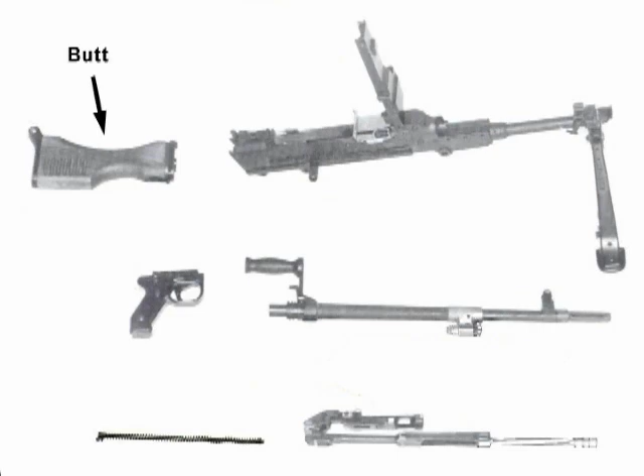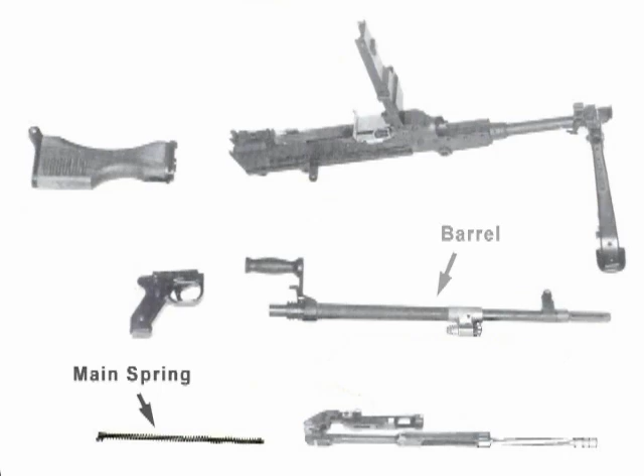The parts of the C6: butt, receiver, feed cover, pistol grip, cocking handle, barrel, main spring, piston extension assembly. Now test yourself on the parts of the C6.

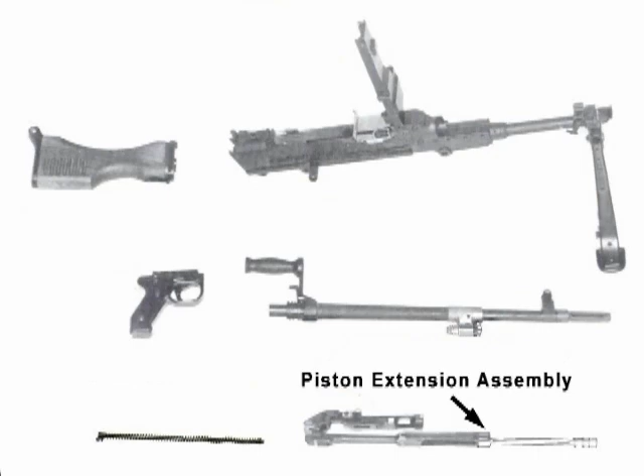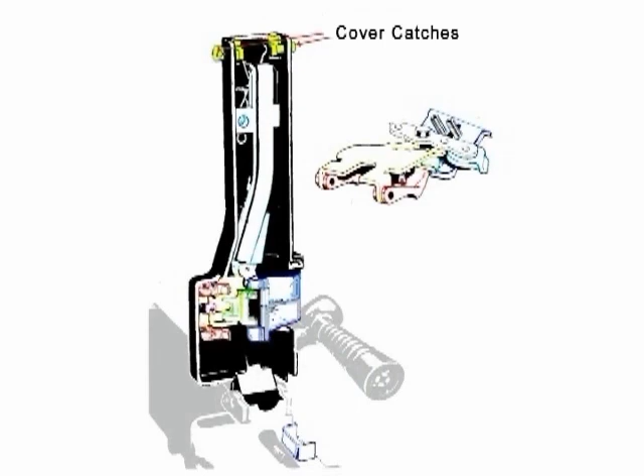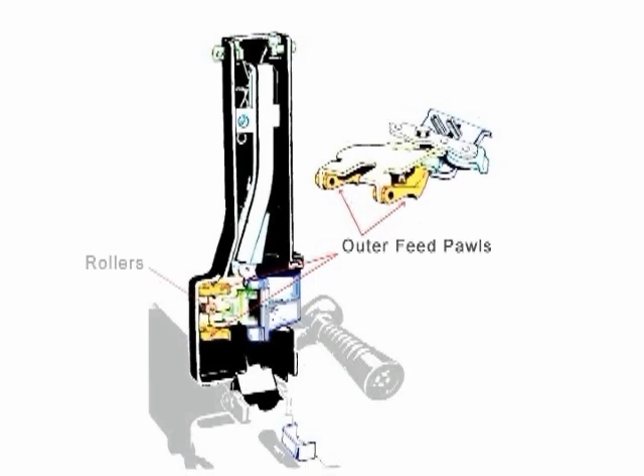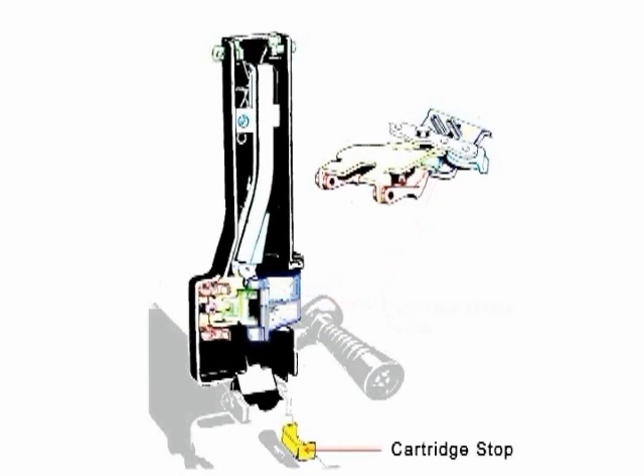The parts of the cover: cover catches, catch springs, feed arm control spring, feed arm, fork of the feed arm, outer feed pawls, rollers, plate, pivot arm, inner feed pawls, cartridge guide pawls, cartridge stop. Now test yourself on the parts of the cover.

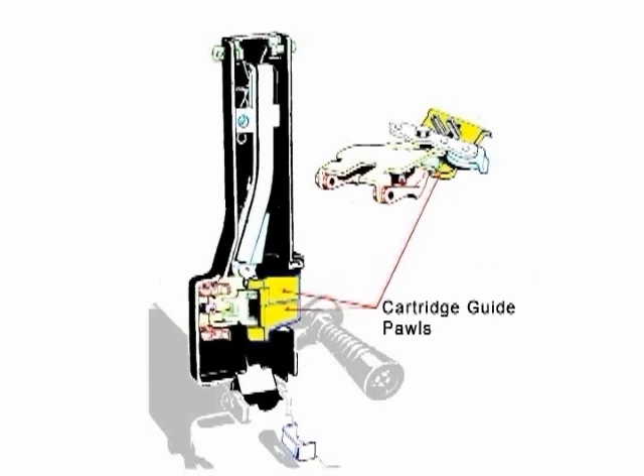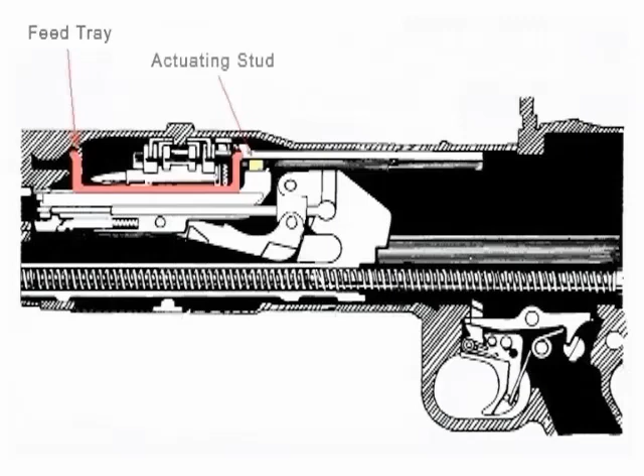The parts of the receiver: feed tray, actuating stud, locking shoulder, locking cam, locking lever link, sear tripper, sear, trigger. Now test yourself on the parts of the receiver.

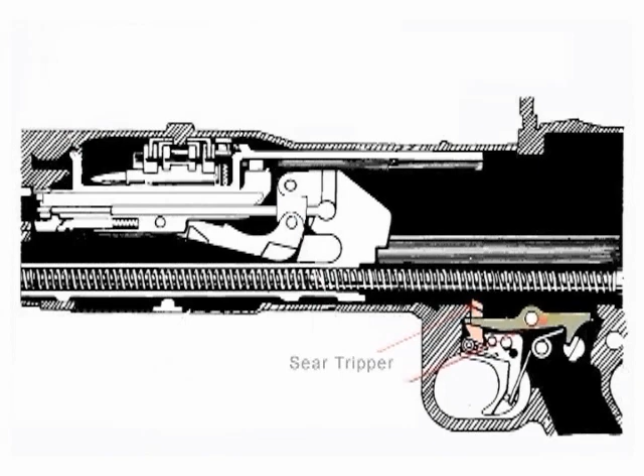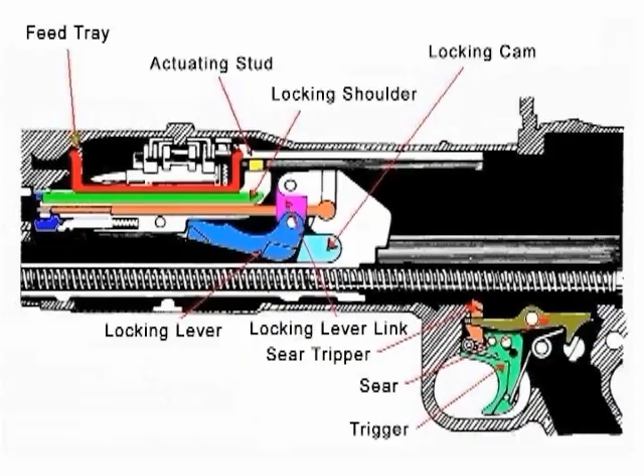The locking lever link rotates forward and up on its axis, lifting the locking lever out of engagement with the locking cams. The breech block is jerked slightly backwards. The breech is now unlocked.

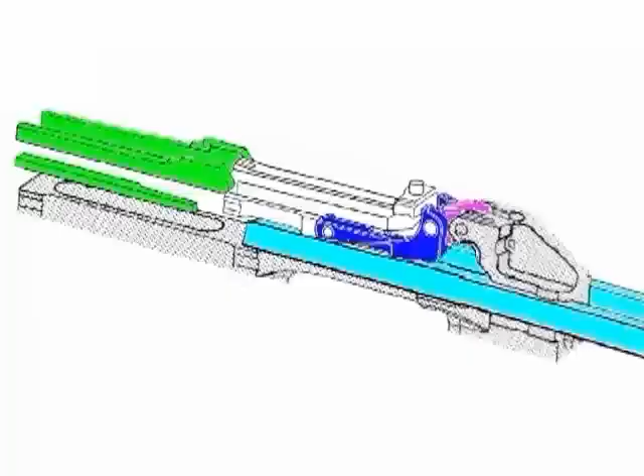When the working parts are fully forward, the locking lever is down in the seat between the locking shoulder and locking cams. The breech block cannot move directly to the rear, so the breech is locked.

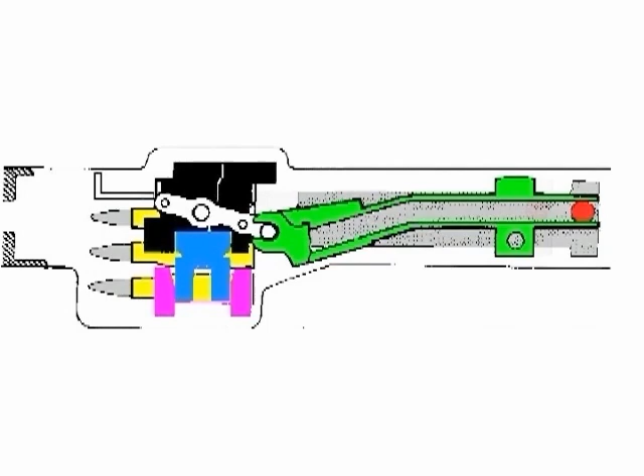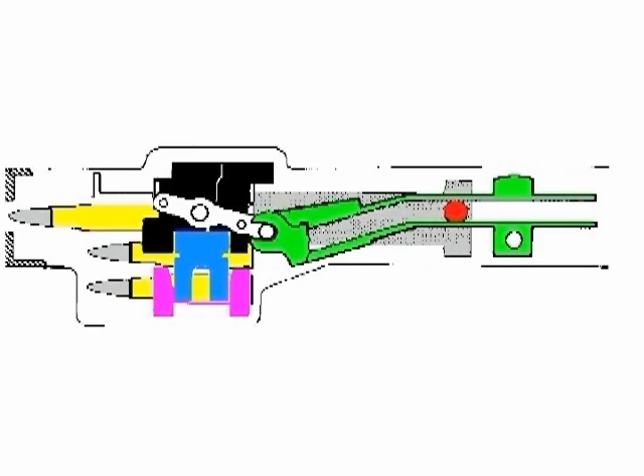The outer pawls push the round, and the inner pawls go behind the next round. Once the actuating stud stops moving, the round is in the chamber.

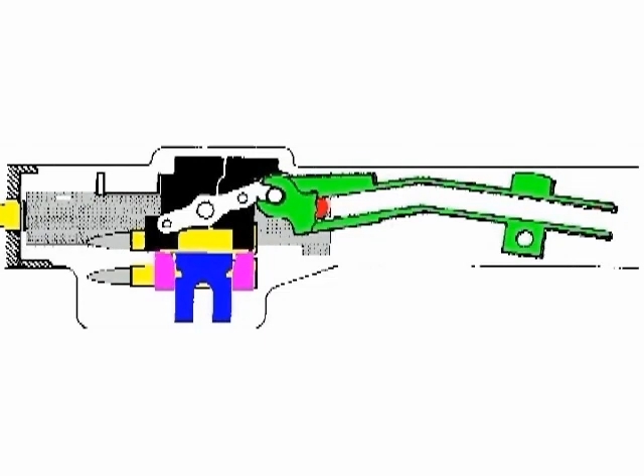When moving to the rear, the actuating stud moves the feed arms to the left, which moves the feed arms pivot. The outer pawls ride over the next round and settle behind it. When the actuating stud arrives in line, the inner and outer pawls stop moving. The feed horns ride under the first round, moving the actuating stud to the end of its course.

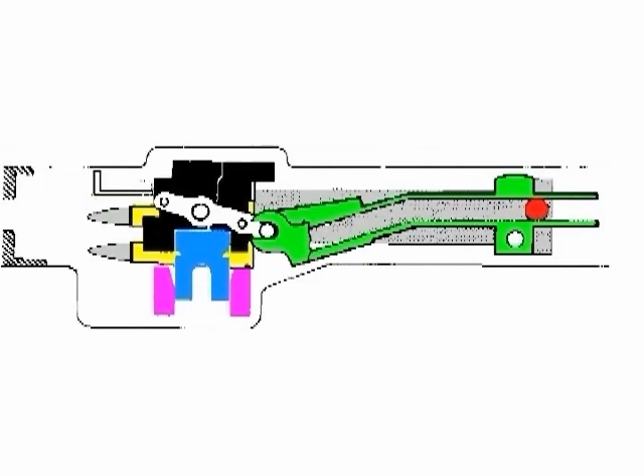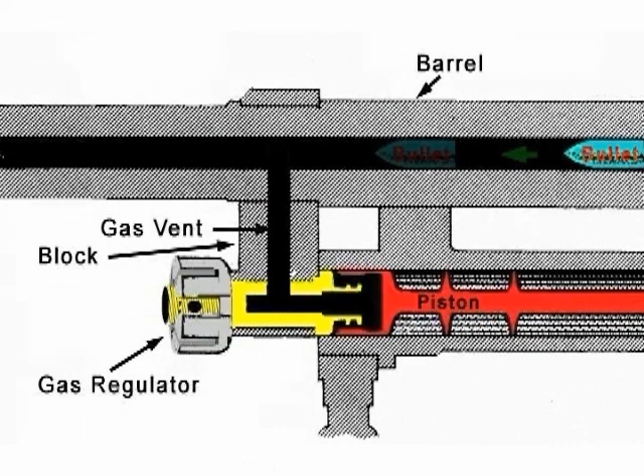When the gas pushes the bullet, it passes through the gas vent, which sends gas to the gas regulator. This sends gas toward the piston head, moving the piston to the rear. Pull on the cocking handle to unlock it. That's followed by compression of the main spring.

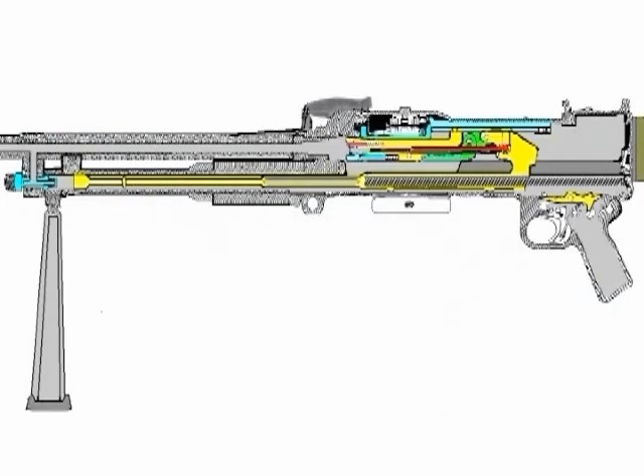On releasing the trigger, the sear remains down, but the tripping lever rises. As the working parts move to the rear, the end of the piston hits the tripping lever, which in turn allows the sear to rise and engage in the bent.

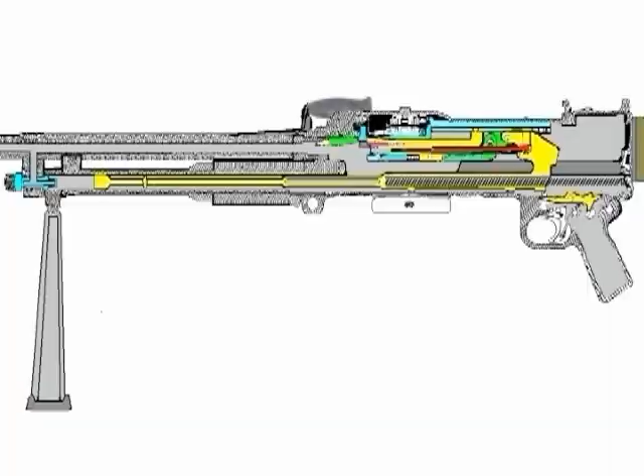When the trigger is squeezed, the nose of the sear is depressed, thus freeing the extension. The main spring pushes the working parts forward. The feed horns strike the base of the round, feeding it into the chamber. As the working parts move forward and the round is fed into the chamber, the locking lever is forced down by the locking arms, thus slowing down the forward movement of the breech block.

The piston extension, still moving forward, causes the locking lever link to rotate downward and back, forcing the arms down to their fullest extension in front of the locking shoulder. The extractor rises over the base of the round, and the ejector is compressed. The round is now fully home.

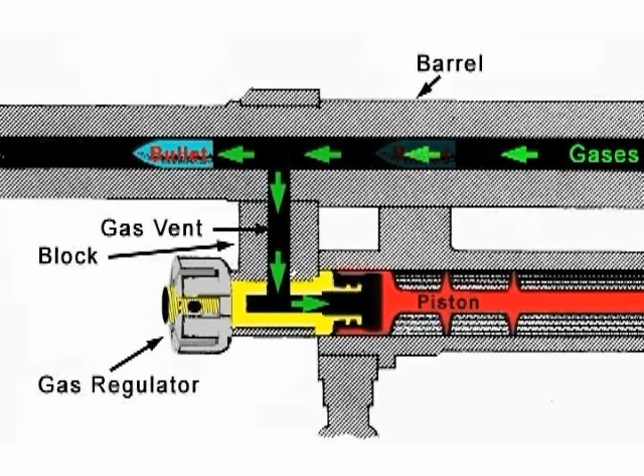When the round is fired, some of the gas passes through the gas vent into the gas cylinder, striking the head of the piston and driving it to the rear. During the primary movement of the piston, when the breech is still locked, the bullet travels from the gas vent to the muzzle. The breech block, being jerked slightly, is enough to affect the primary extraction of the empty casing.

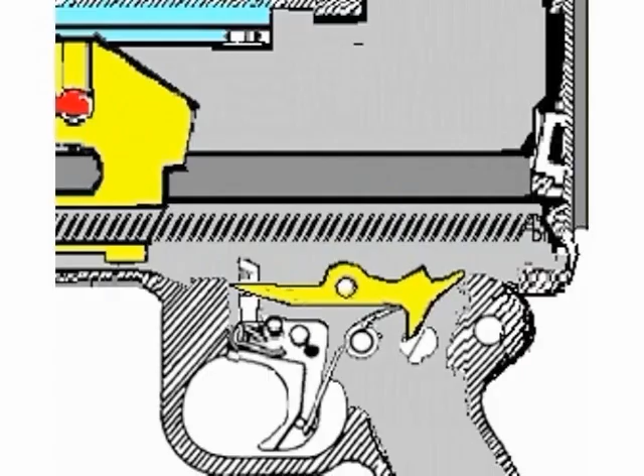When the breech is fully unlocked and the breech block starts its rearward movement, the extractor withdraws the empty casing from the chamber. The ejector forces it from the face of the breech block out through the ejection slot. The working parts continue to the rear and the return spring is compressed.

If the trigger is not squeezed, the sear remains down but the tripping lever rises. As the working parts move to the rear, the end of the piston hits the tripping lever, which in turn allows the sear to rise and engage in the bent, holding the working parts to the rear.

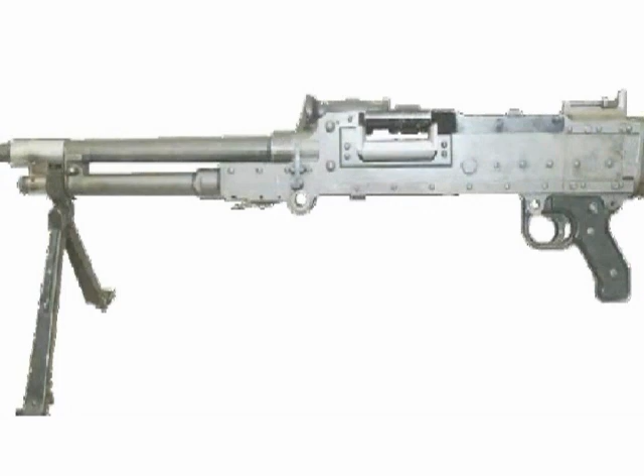Provided that the trigger is squeezed, there are rounds in the belt, and sufficient gas is made available by the gas regulator adjustment to cause the working parts to rebound off the buffer, the actions of feeding and firing will continue. You should now understand the mechanism of the general-purpose C6 machine gun.